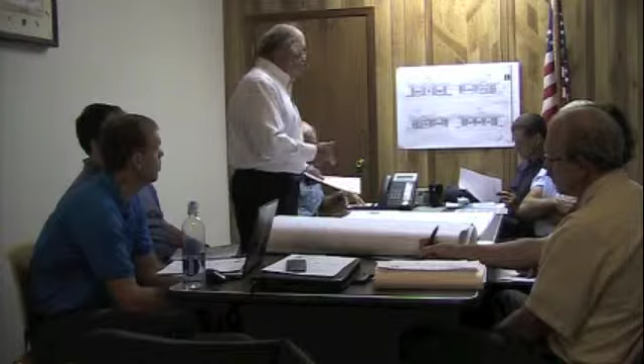If you ever get over towards the northwest corner of Iowa, it's right there. Ray will call the manufacturer and see if there are some other ones that are closer. That'd be great. I'm guessing I'd have at least one judge who would be able to sit down on it, just look at the lines and the heights and everything else.

Well, this is the public seating bench. Oh, no, I'm not worried about that. Oh, yeah, this is just the public seating pew. You don't care if they're comfortable? Keep a cushion. Okay, anything else? So that's about it.

Now, Scott, if you have any comments, we're gonna continue to develop this, so I can incorporate whatever you see needs to change, as long as it's in our budget. In about a week and a half, we're gonna send this off to the estimator and try to get a handle on cost.

Is that the lectern there, kind of in front of the bench? No, in front of the bench is a work surface for the reporter. The lectern is out in front of that, kind of towards the end of the witness box, or the jury box.

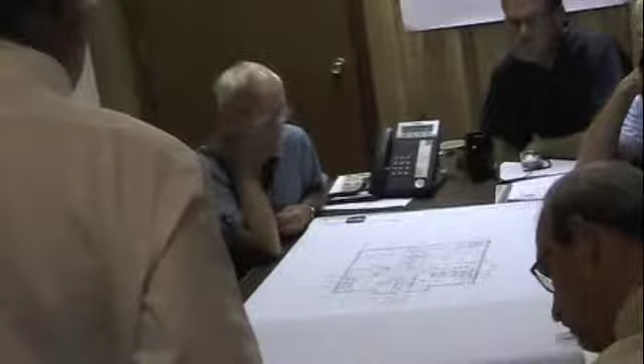Starting to show some of the countertops that might be more permanent, and then blowing stuff up on the detail sheet. We're still fine tuning some of the furniture in terms of what existing furniture will be reused. Don is spearheading that effort, but he and I are going to coordinate, and that'll be updated for the next step.

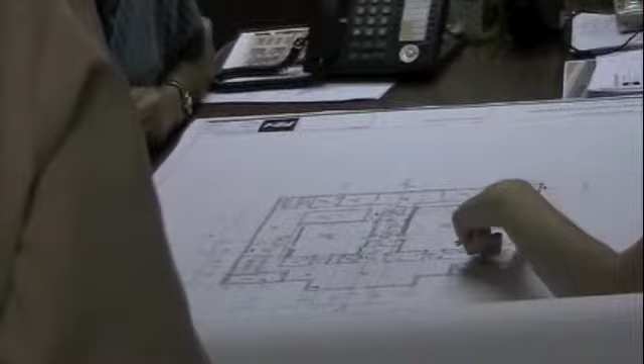And then on the upper level, starting to show the floors since the floors are permanent. Starting to show where the height change is, and then just our blow-ups, and just tweaking a few of the walls for coordinating with Ray.

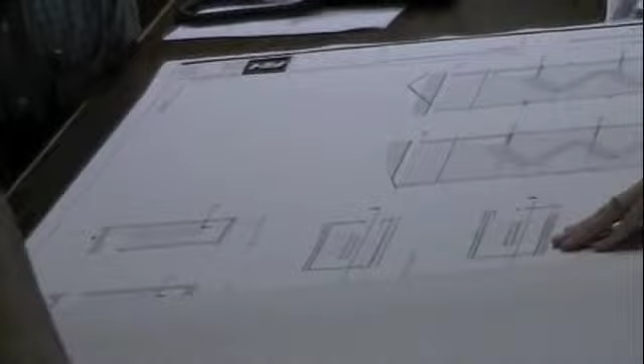So if we were to go to A7.1 and look at one of my sheets, you would see blow-up plans of each of the three stairwells, and then we'll go through and dimension and give more information on how the handrails are gonna work. And then we'll show a section here, and it'll show just kind of what the stairway looks like.

But I'd be happy to go through anything else. There's a lot of wall sections. Yep, we have a few pages of wall sections, and I think the neat ones are gonna be how we end up detailing with the column and the wall and what this ends up looking like.

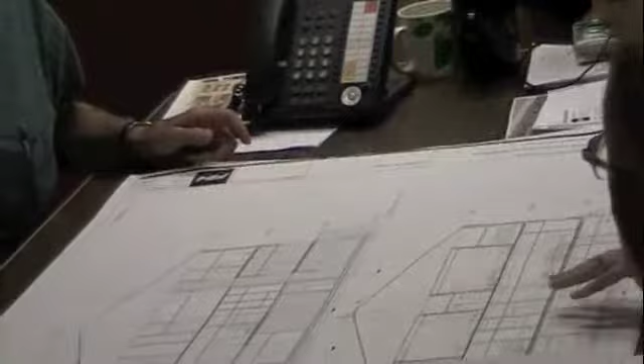So we have some pretty big sections here, and then we have some more typical ones - we have building section, which is pretty generic. Still shows all the furniture, which I'm thinking I should turn off, but you can see the structure of the precast and that started.

And then on the next sheet, this is just gonna be the typical wall section. So you can see the precast to the concrete, to the stone banding, to the top, and then we have to revise the roof to accommodate the SIPS panels in that depth.

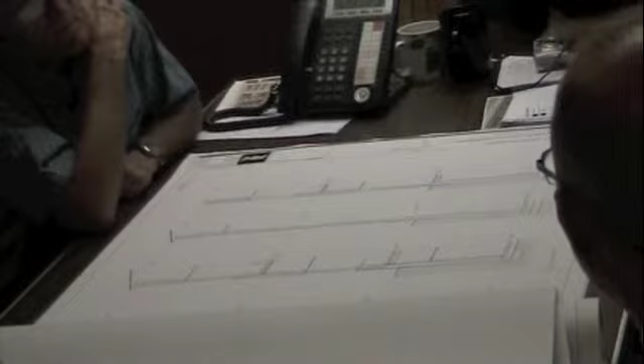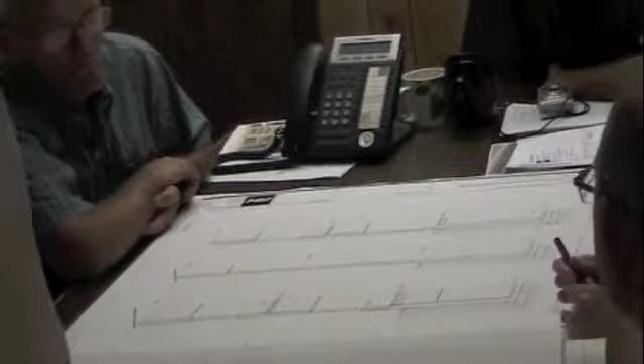So precast walls will start here, or precast is gonna start right here. What is this? And then this precast is gonna be an angle ledge for this to sit on. Now, that precast wall system - is it the whole thickness, and all you do is come in and put sheet rock on it? Or is there furring? There's furring strips gonna be, you can see here.

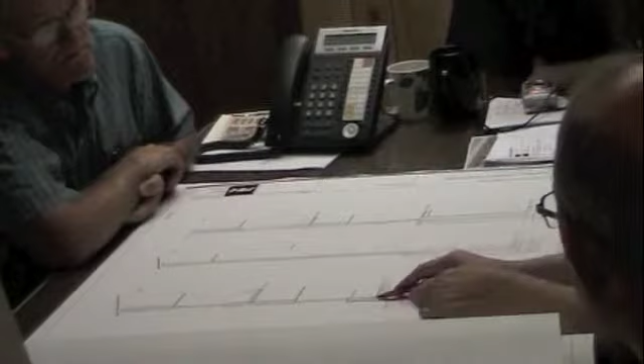This is the precast wall, which is 10 inches, and then we have some metal studs here which get the foam insulation in it, and then we have our gypsum on top of that, so you'll have your nice finished wall. So the wall is still pretty beefy - by the time we get it, it's gonna be 13 and a half or 14 inches deep, but it's gonna be really well insulated. That's very good, nice.

And here you can see toilet partitions, starting to show some of that detail. Structural has stuff to - on that note, it's just made me think, with the insulation values we have and the load calculations we're doing, we were able to make that well field fit because it's smaller than a typical building would be of this square footage. You know what I mean?

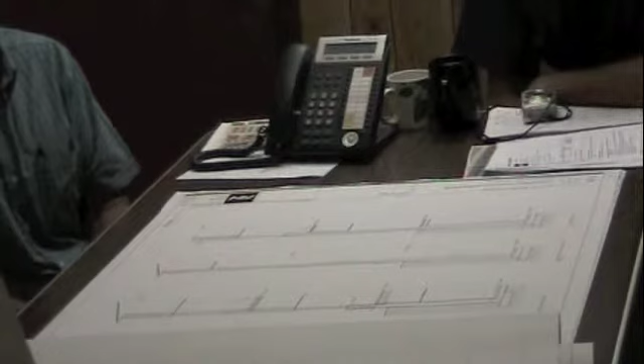So because the load is less, the load is already efficient, clearly less per square foot than a typical building or a rule of thumb I would normally use. So that actually helped us make that well field actually work. That's good peace of mind that we're heading in the right direction. And if we can accommodate it through the precast and through stuff that we're doing anyway, and don't have to add a whole lot of stuff, that's even better. Excellent.

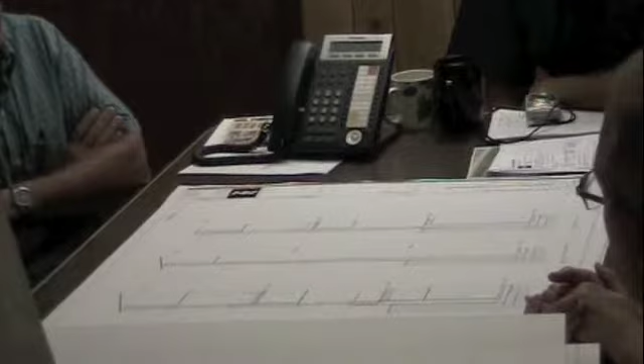I'm trying to think, it's not super exciting. We've got ceiling plans started in terms of where we're gonna have tile ceilings, and we're starting our schedules, and room finish schedule - plot it out here.

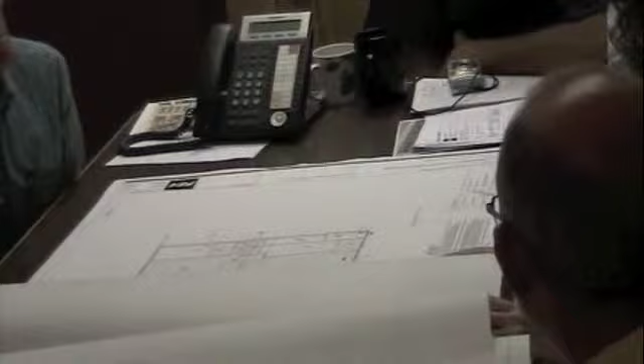Yeah, that's fine. So at this point, we've got everything generated, we've got all our sections cut, and everything - we just have to add some more detail. You got a lot of information for our DD stuff, for our cost estimator. When we turn that over in about a week, we're gonna have a lot to go on.

Yep, the end of next week, I'm gonna send the drawings to the printer in Ames for the cost estimator, and then they'll have that following week to pull together their costs and ask their questions, and then we'll fine tune it for the meeting on the 27th.

Is the electrical raceway going to be the same system the courtrooms have, or will the other levels have something different? In terms of raceway, yeah, that only occurs at the workstation, like in the courtroom, unless there's a need for it at some of these work counters, and that could be incorporated in some of the work counters as well.

We'll have to look at that, not quite there yet on that. Okay, typically it would be for flexibility of design. In a typical space like this, you would still have convenience receptacles and data receptacles lining the walls.

But we've got some locations where the desks are floating, like the auditors, so that might be different. We're bringing power and data to the floor one way or another, and we've got flexibility because of the lower level.